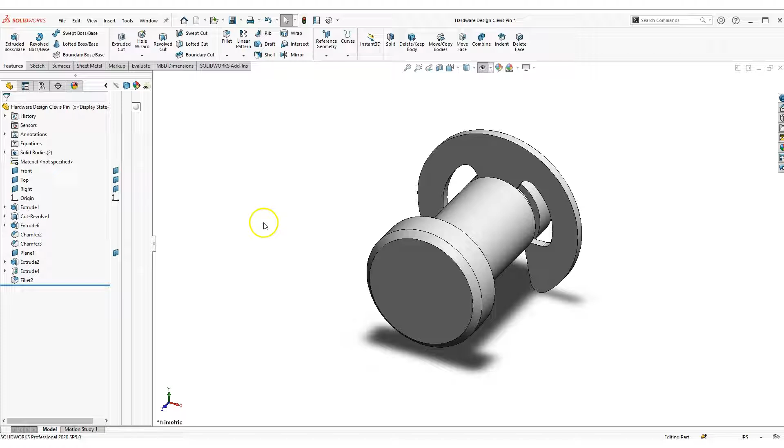This design has two parts, so I'll be working with solid bodies here and we'll go from there. Yep, let's go ahead and begin. And if you're new to SolidWorks, what you can do is go to File, New, and under Tutorial, just click on the part and press OK. And the first thing you want to do is turn on your datum planes like that and change your units to inches if you like, or millimeters, whatever works for you. I usually work with inches, but yep, let's go ahead and get started.

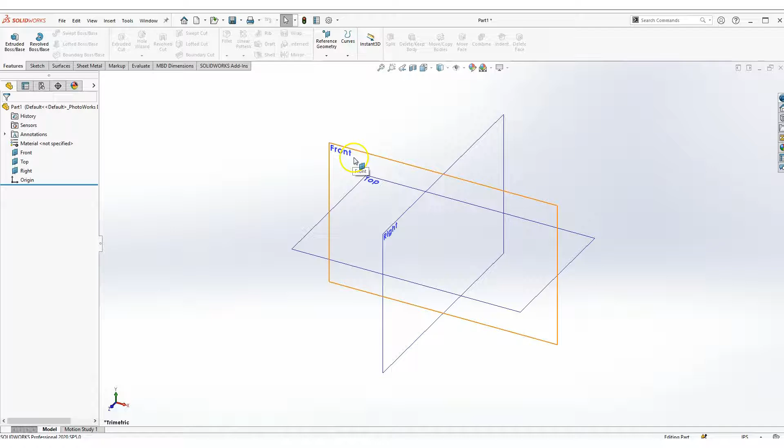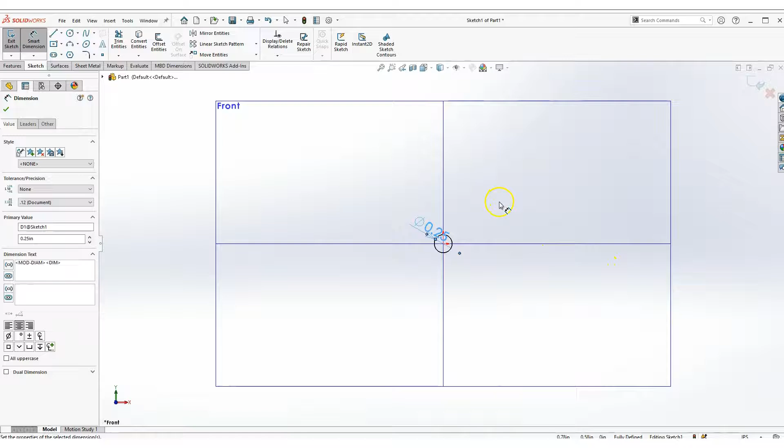So first thing what you want to do is work on the front plane, click on the front and click on sketch and go to circle here, click on the circle, snap it right to the center, and once you're done, press escape and give it a smart dimension there. Click on it and give that dimension of about 0.25 there. And I'm going to hide the datum planes. Hide it. I'll rotate it really quick.

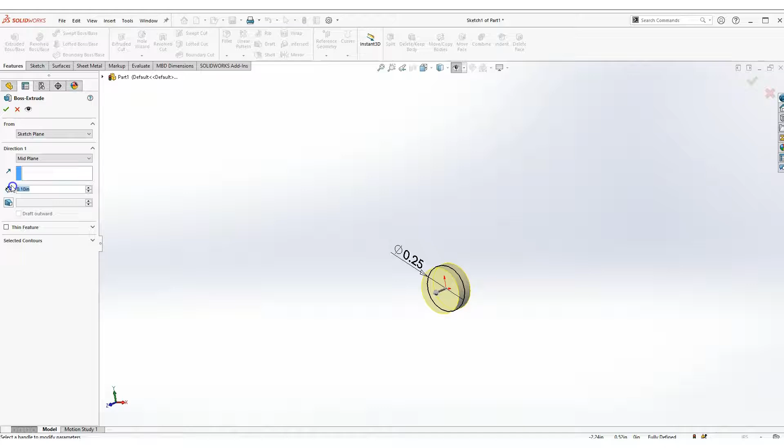So now what we need to do is extrude this. So what we'll do is, while we're still in the sketch, you can go to Features, click on Extrude, and click down here on direction 1, instead of blind, click on mid plane and give it a 0.5, half an inch dimension there, and press OK.

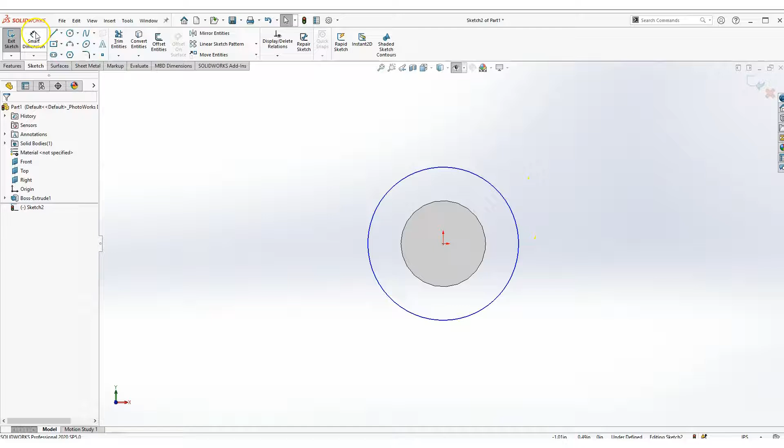And next what you want to do is create the head of the pin. So what you can do is click on that surface, click on sketch, and press space bar and click on normal to. So you'll just make it normal to that plane, and click on another circle. Just draw a circle like that. Now dimension the circle, click on smart dimension, click on the circle and give that about half an inch, 0.5, or give that 0.38, something like that, and rotate your model if you want to, and extrude that sketch you just created.

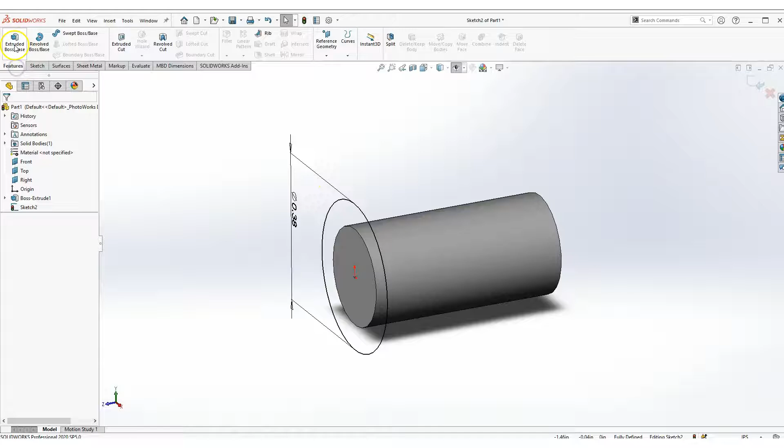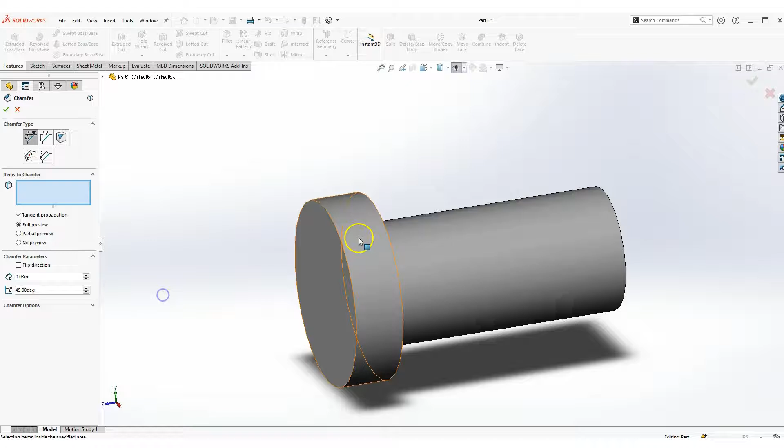And you can do features, extrude outward, but you don't need 0.5. Just give it a small dimension, give it 0.1, something like that. Now what I will do is add a chamfer on that edge and this edge. So go click on features, click on chamfer, and give it a dimension of about 0.03, something like that. And let's see what that looks like. Yep, that's fine. Click on that edge and click on this edge and press OK. And we have the pin pretty much ready.

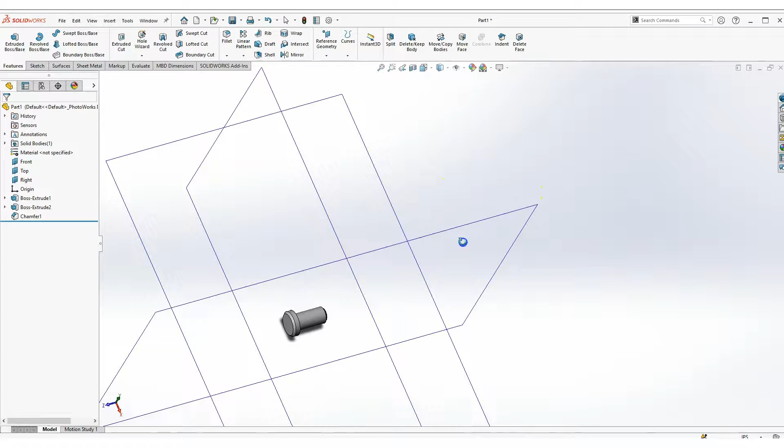Now what we'll do is we'll need that groove for that washer that goes on the pin. So we need to create that groove here. So to do that, let's turn on the planes and see what makes sense to work on. So I'll just look at it from the top view. Go click, press space bar, click on the top. So yeah, we're gonna have to work on this plane, which is the right plane. I'm just gonna do an isometric one more time. Click on the right plane, do a sketch, and press spacebar, and you can do normal to. Now you can hide your planes if you want.

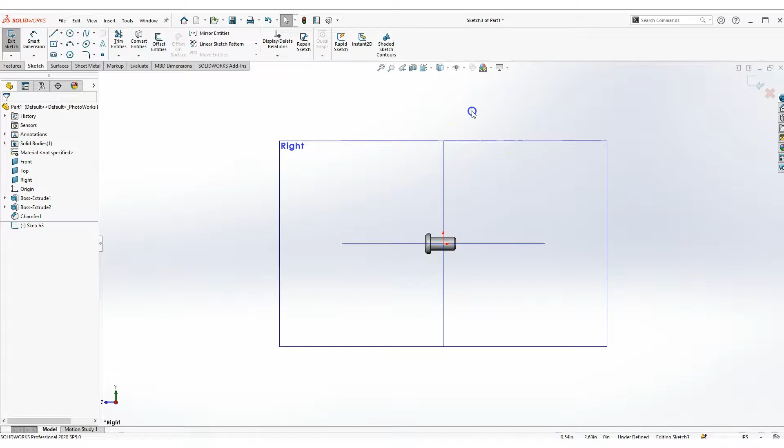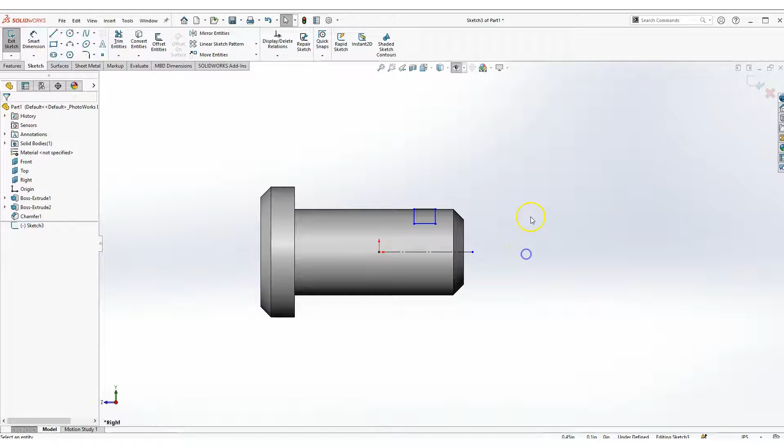And I'm going to go ahead and create that sketch there. So here, just click on your corner rectangle pretty much and just draw something out like that. And I'm going to make a reference line here just in case I need it, but I don't think I will need it, but I will make a reference line there.

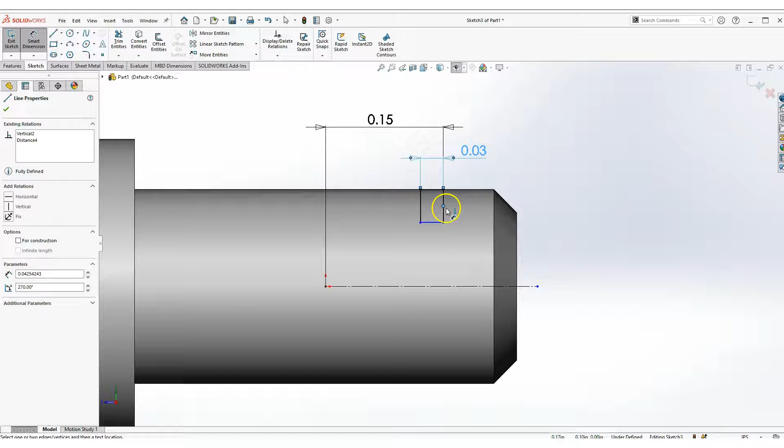Now let's go ahead and give it a dimension to that sketch. So what we can do is go to Smart Dimension, click on the center point of that axis, click on that outside dimension and give it about 0.15. And now we'll need to dimension this slot here. Click on that first line and give it about 0.03, and this dimension, this line, give it about 0.02.

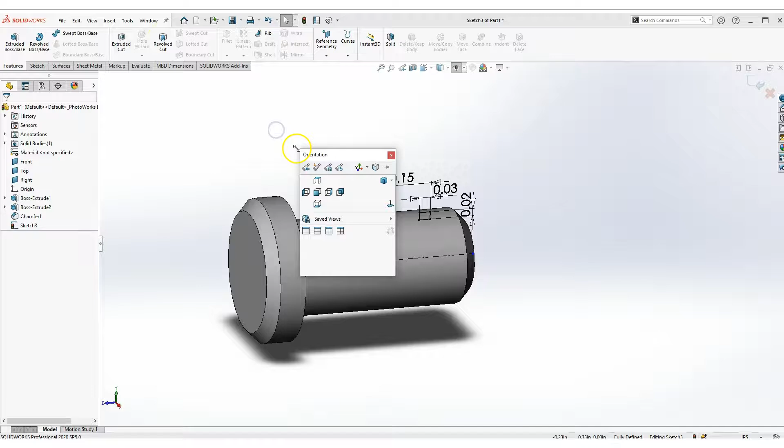Now, what I'll do is I will do a revolve cut about this axis, the center axis of the pin. I can do it, click on features, click on revolve cut. But one thing I want to check first is, yep, that's right. So let's do a revolve cut, and axis of revolution will be my center there, and press OK once you're done. So now you have that groove there on the pin.

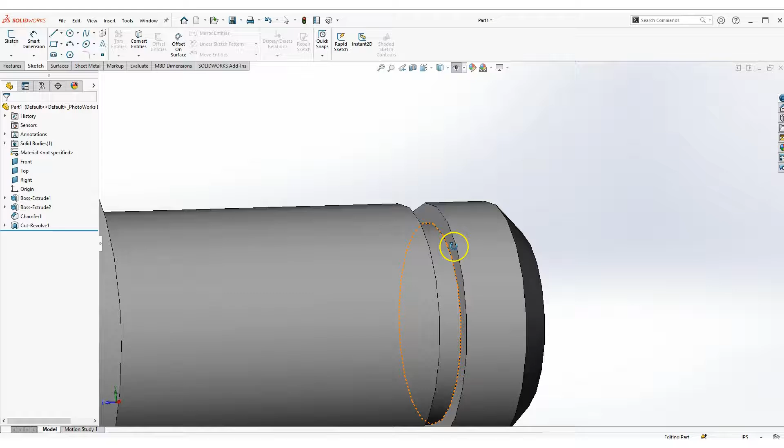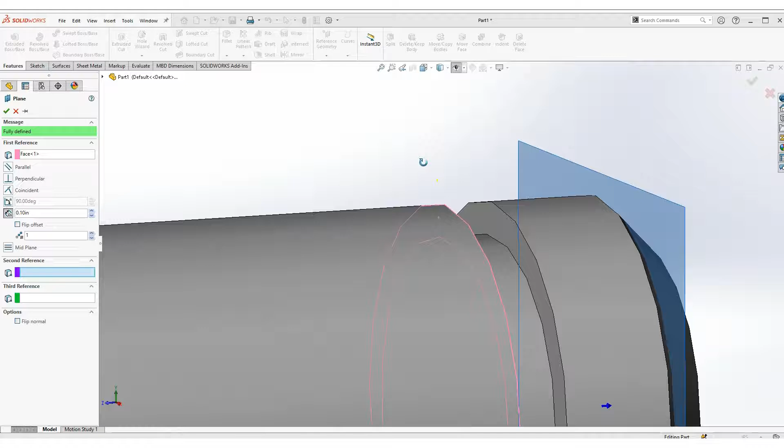Now what I want to do is create that washer. So what I'll have to do is make a mid plane between these two surfaces here. So what you can do is go to features, click on reference geometry, and click on the plane. So here what you can do is click on the first surface, hold down control, and click on that surface while you have your control pressed down. And once you're done, press OK. Now you have the plane right at the center of these two, and I'll turn my planes on one more time. Yep, you can see that there. So next, what I'll do is just do a sketch on that plane there.

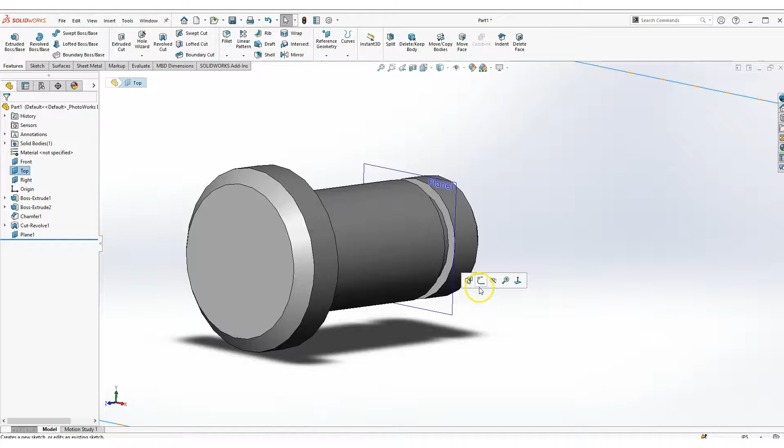So what I'll do is click on that plane you just created, and do a sketch and hide all the other planes. You can hide the planes again and press spacebar and just go to normal to. Now you can draw the washer profile.

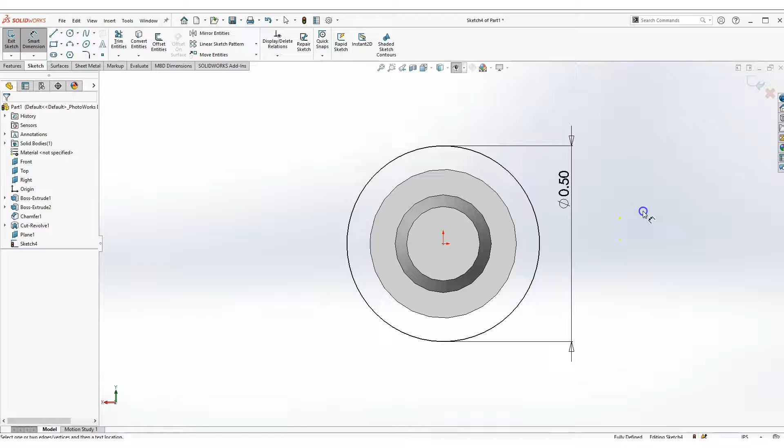Click on the circle, click on the center point, and give it a dimension to the circle. And I'll give it about like 0.5 there. And so you can see that's at the center. So we'll have to extrude that.

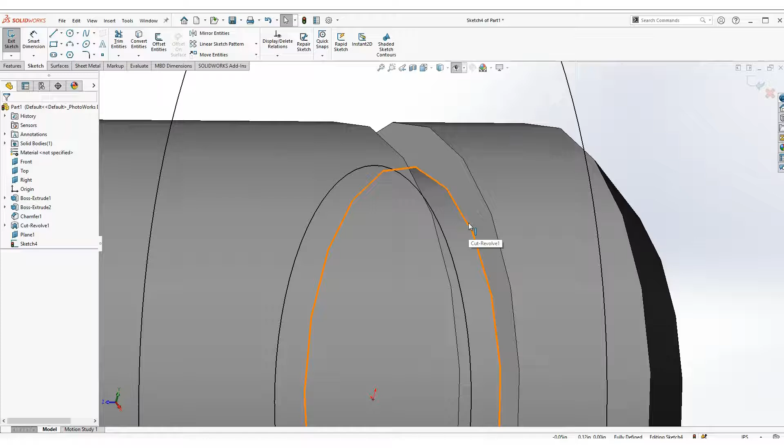Oh, well, before I extrude that, I want that hollow inside diameter of the washer. So what you can do here is click on that edge. Not that outside edge, but the inside edge of that groove. Click on it and go to convert entities here. I could have drawn another circle with that profile when I was doing the outside circle, but what I did was just convert entities. So basically that just converted that whole circle right at the center of that plane that you're working on.

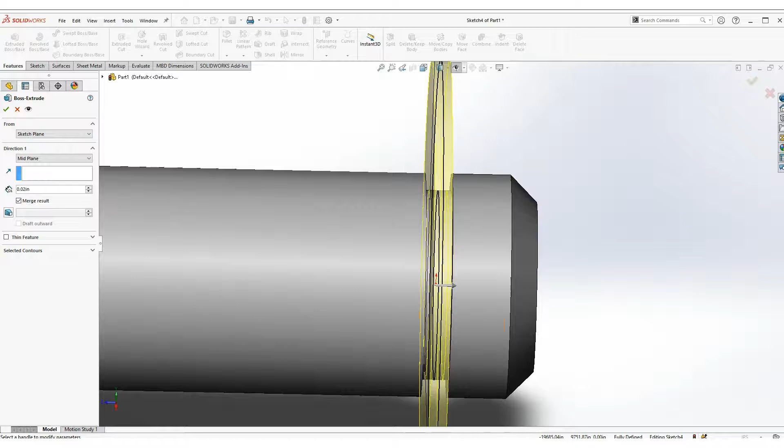Now go to features, go to extruded boss/base, then drop down to mid plane and give it a small dimension like 0.02 or smaller than that groove there. 0.02, yep. Press OK. And oh yeah, before you finish your extrude, go ahead and edit your extrude one more time and make sure that merge result is checked there, and press OK.

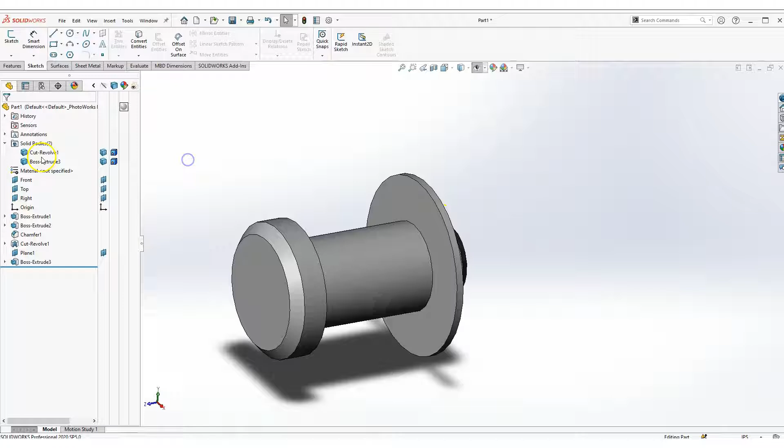Now you have two bodies here. You have the cut revolve and this guy here. Now I can hide this guy and work on that plane there. So I'll hide my first part, and now I'll work on this part to create the washer. So click on that surface, click on sketch, and press spacebar, and you can go to normal to. So you're in sketch mode here.

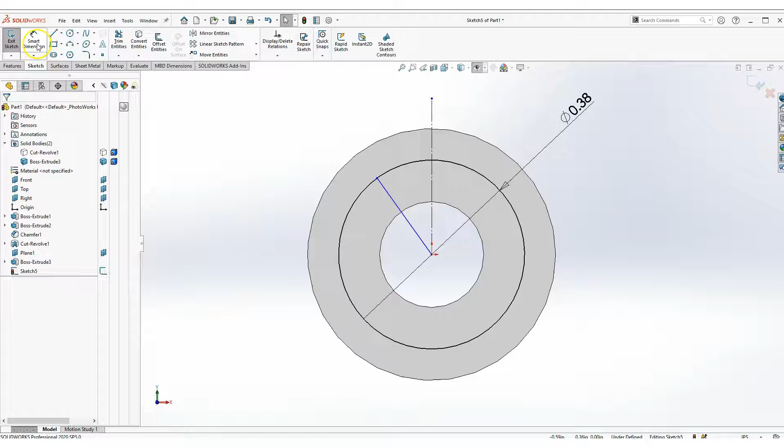So here I'll start making my sketch. I'll do that and give that about 0.375 or so. And I'm going to start making the profile. I'm going to make some reference line here as well and click on it, make it a reference there. I'm just drawing the lines here. So what I did was click on the line, snap it to the center, and click on the arc, the circle you just created, and give it an angle dimension here. Maybe like 30 degrees or so.

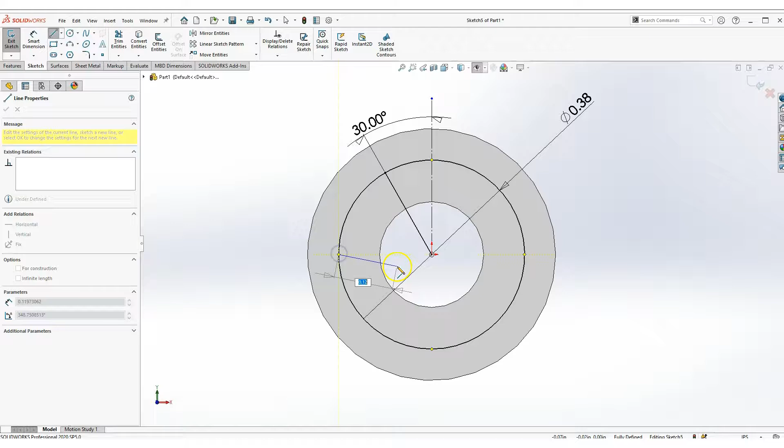Same thing here. What you want to do is create a profile, something like that, that goes outward. Right, I'm just going to make another reference line here one more time and dimension that really quick. Go to Smart Dimension, click on that, and the reference line you just created, and give it like a 10 degrees there.

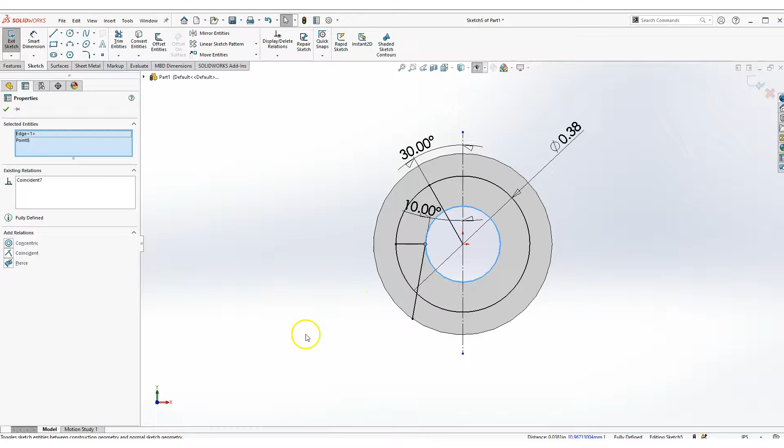Perfect. So this is still undefined. What I'll need to do is snap this point to that arc there, click on that edge, and hold down Control and click on that point, and make it coincident there. That looks good. And I'll start trimming my surfaces as well, so I'll have the profile that I want on that washer.

And what I'll do is mirror that profile on the other side. So I'll go ahead and start trimming really quick. Go to trim, power trim, the outside I don't need. Here I don't need this also. But I'll make this guy a reference also. That's a reference. So my profile right now looks something like that, but I want a closed loop here, right? So I don't have any problems when I'm done with it.

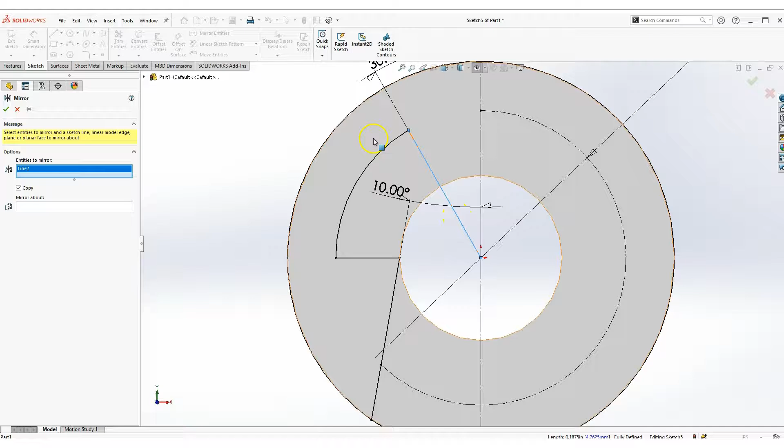So this outside edge, click on it. You can do convert entities. So that pretty much picked up that outside diameter of that cylinder there. Now I'm going to mirror my entities. Click on mirror entities, and you want to click on that line, this arc, this line, and that line, and you want to mirror it about the reference line to the other side.

Press OK. Right now I still need to trim down here. So trim so that outside arc is gone. Do it on both sides. So what you want to make sure here is that all the solid lines form a nice closed loop. You want to make sure there are no lines sticking out, otherwise it will give you problems. And I'll show you what I mean by that. Let's say you have a line, something like that, that's sticking out. If you were to finish your sketch, or do an extrude, it will give you a problem there. But go ahead and delete that there.

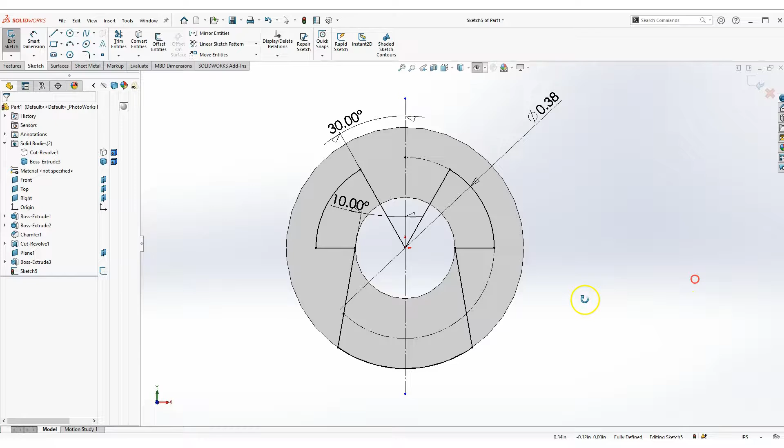So this profile here, I'll then cut the washer from that profile. But let's see if that will work for me. Just go to features and do extrude cut and just do through all and press OK. Yeah, it worked really nice there.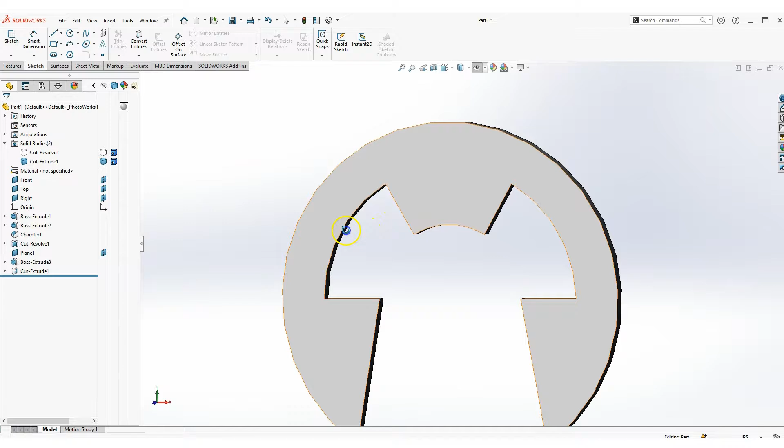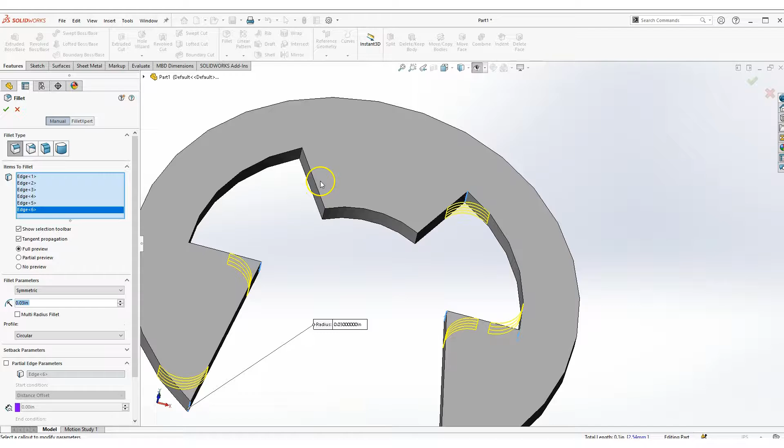Now what I want to do is add some fillet around these sharp edges. Go to features, go to fillet and give it a small fillet there, like 0.03. Click on the surfaces there, there, there, there, and one more there, and see what it looks like.

But I'm going to turn on my pin that we created earlier and turn that on. So yeah, it looks really nice. There you go. So press spacebar, make it ISO, and there's your clevis pin design, a hardware here.

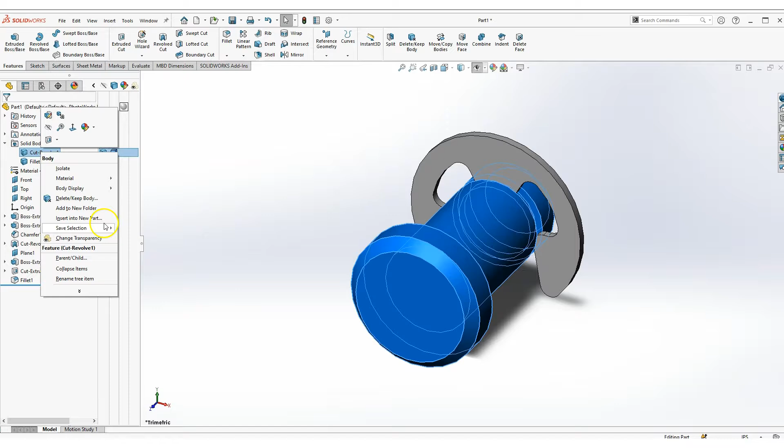But one more thing, once you're done, if you want to, what you can do is just right click on this part and do insert into new part, and you can make a new part out of these parts as well. So you can create an assembly with these parts.